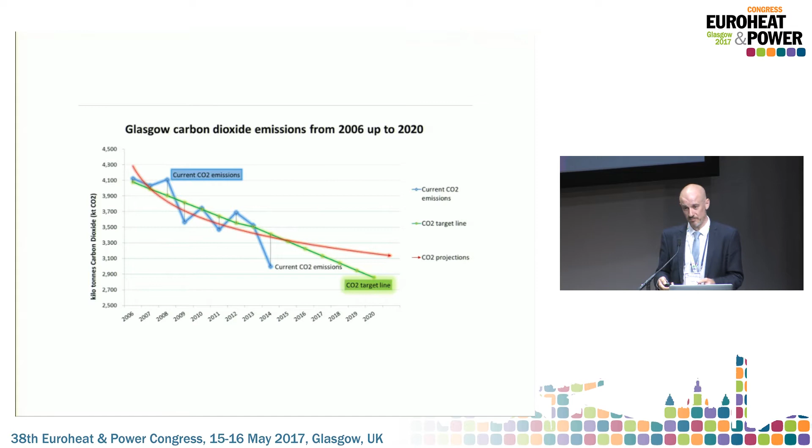So although we've made good progress, there's still a long way to go. Within that plan, there were 33 actions, each detailing how we would approach, both strategically and technically, achieving these targets. Amongst those actions, one was to phase out coal, oil and older inefficient electric heating in Glasgow.

Glasgow has the unenviable record of having a lot of fuel poverty, which for us is the situation where more than 10% of your earnings are spent on your utility bills. So in a very real sense, at least a third of the people of Glasgow have to choose between heating and eating, which is not a situation that we as a council believe we can accept.

A lot of this comes from expensive and inefficient heating systems. Another action was to develop a number of coordinated district heating schemes in the city. This would be expanding out from installed schemes, covering a mixture of installations to commercial and residential premises.

Unfortunately, I've not been able to be here for the whole conference, but I'm sure there's been discussions about the need for that kind of mixture of building types to make district heating successful.

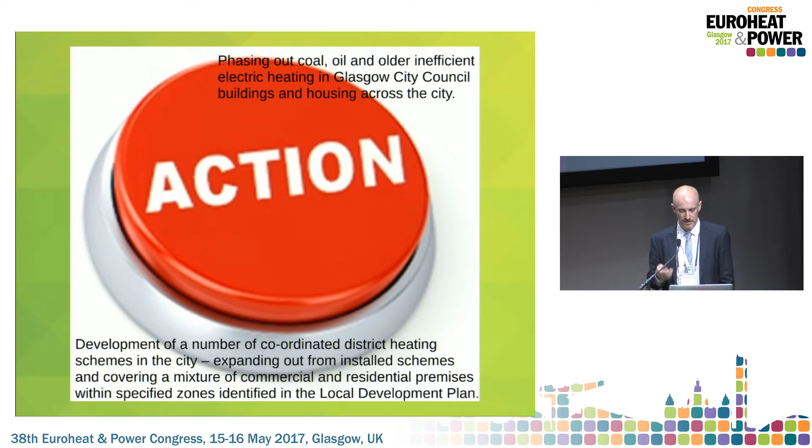To date, our ambitions have been largely anchored in gas combined heat and power engines. But as I'll show you, and as you should have heard through the progress of the conference, we are now developing more innovative ways to capture heat.

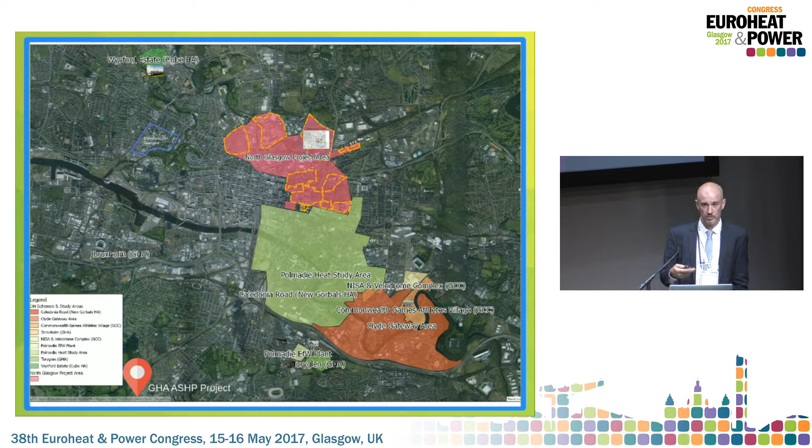So in 2014, Glasgow City was selected to host the Commonwealth Games. As part of that, our commitment was to create a village for the athletes to stay in for the duration of the Games. What you're seeing here is the athletes' village.

Within this village there are 700 homes, all connected to district heating. The sports arena is also connected. Now, while this is a huge success with 700 homes, they've now transferred and people live there — half of them socially rented, half private sale.

Within this area of the city there's a lot of poverty, and there's a lot more opportunity to expand this district heating system. We are looking at another 300 houses, a primary school and a nursery school.

Another major development going on in Glasgow is the creation of a £154 million energy-from-waste plant in the city. This is going to take 90% of our landfill waste away from landfill for processing, to create renewable energy and heat.

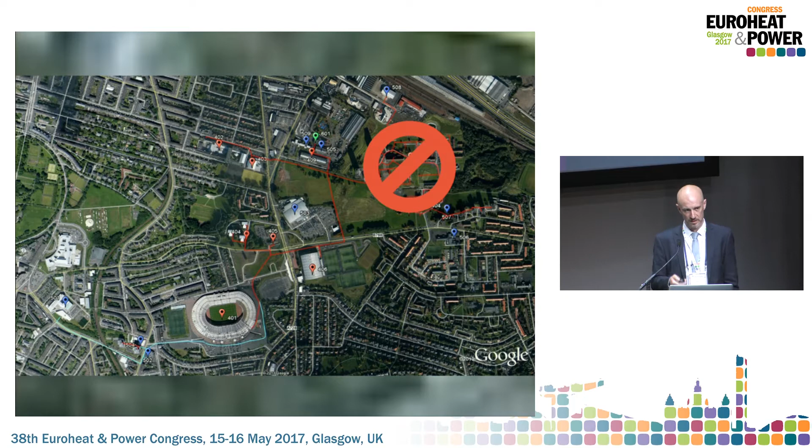So you have Hampden Stadium at the bottom there, the National Football Stadium, some housing association high-rise flats, shops. What's actually happened though, as well there being some great opportunities here, is that the time it's taken to develop the plant and then the energy centre and associated district heating means we've actually lost a major opportunity to connect up this new housing development — and in that time we've put gas in instead.

This is a real problem. I think in the UK, and in Glasgow, we're trying to make very different planning aspirations line up timing-wise, which means that project opportunities are quite often lost.

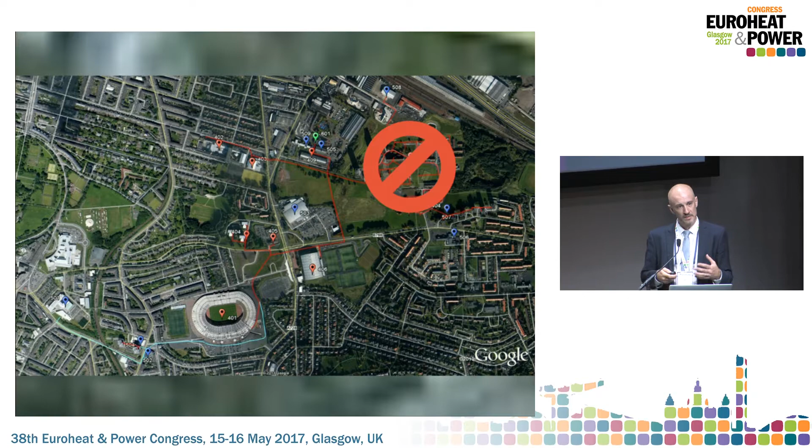This is another part of the city that was seen as a satellite network. The aspiration was to take the heat from the energy from waste plant and move it towards the city centre. This satellite network was supposed to be built in advance and then connected at a later date. Unfortunately, we couldn't financially make this add up.

One of the recurring themes I face in my daily life is that in the UK and Scotland, the way rates are applied to district heating, business rates, is punitive for district heating. If you put gas installations in, the rates are infinitesimally smaller than if you put in district heating. Gas installations are rated on their utility value, while district heating is rated on its construction value. We all know how expensive and laborious district heating installations are, so the rates that come with them make the heat difficult to compete with gas.

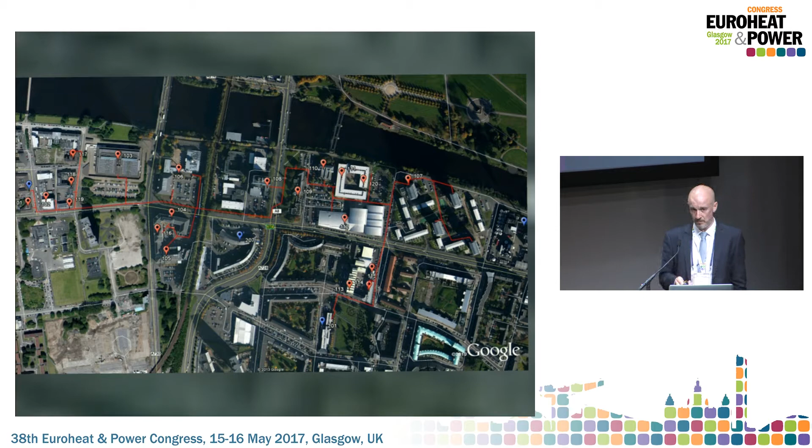This network never happened, but what I'm pleased to say you will have heard about probably earlier on is that we're now building an energy plant on the River Clyde, putting water source heat pumps in there and recovering heat from the River Clyde. So we're effectively replicating work that we've seen done by a local company, Star Renewables, in Norway and Drammen.

We'll take the water out of that and take that heat through various stages of a heat pump, get it up to the grade we want, and then provide heat—not blow up, but provide heat—to the Adelphi Centre, which is a business centre, a leisure centre, and this large housing development as well. If you think back to the wider picture, the length of the River Clyde, think how many opportunities this pilot project will give us.

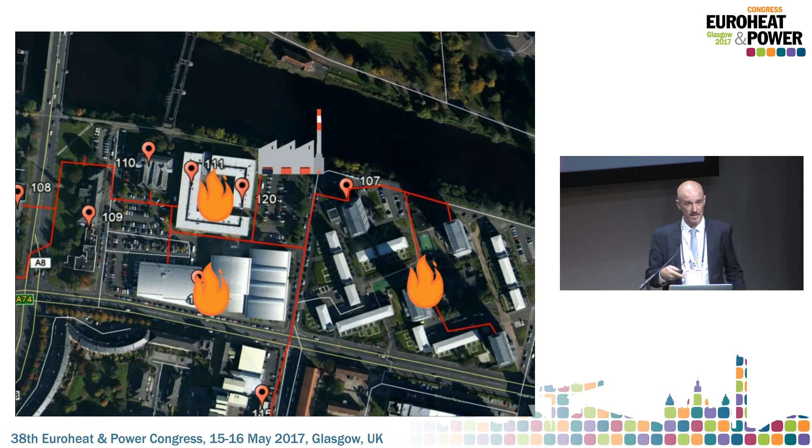We also have a district heating system in the north of the city called the Wynford Estate. This is a very large, for us certainly large, district heating network. It's 1,700 homes connected, socially rented homes, plus another 200 or so homes that have elected to connect themselves. This is a fantastic network. It does what it needs to do, providing low-cost heat through gas CHP engines.

But this provides yet another example of some of the difficulties we face, in that this was a heavily impoverished area, very, very poor. When they were promised this district heating, they were promised heat that was going to be so cheap they couldn't believe it. This was an area where people just didn't have their heating on—they couldn't afford it. So when this lower cost heat went in, they got heat, but it was still more expensive than they were used to, because they weren't paying anything. So even if it was low cost, it was still more expensive for them.

A very vocal minority then started to complain about that and gave district heating quite a difficult image in the city. Through an extensive period of communication and education, we've made people understand how to best make that system work, and it's more successful now. But I think that's an important message for us—the way these things are communicated, and the education and behavioural piece, is quite extensive.

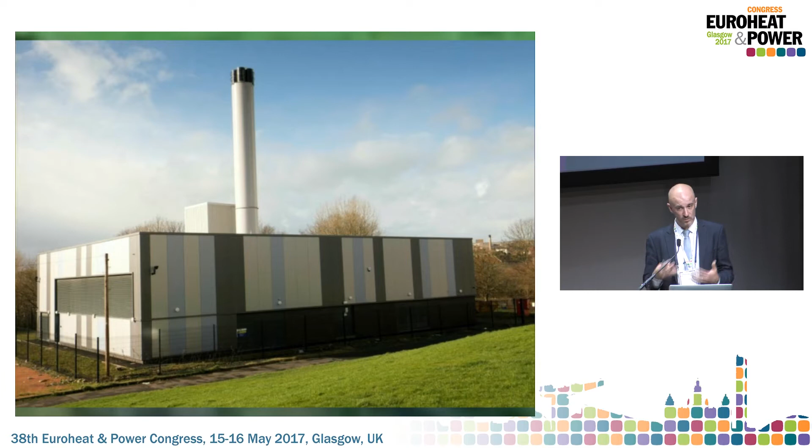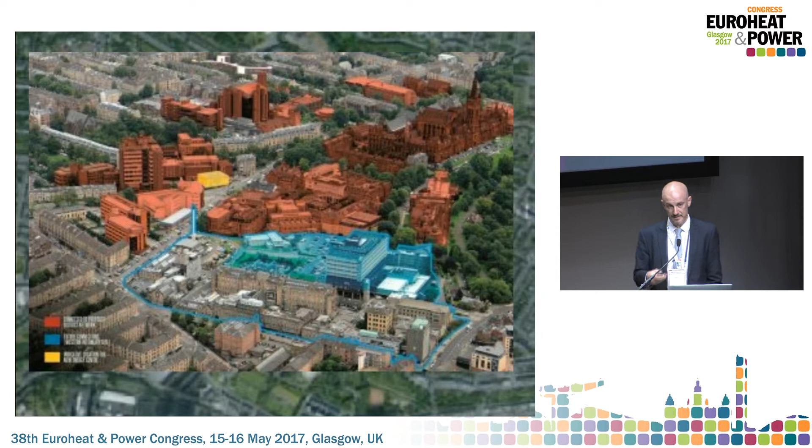The University of Glasgow is a very historic university with a large campus, which has now moved from a steam heating system onto gas CHP district heating. Every building you see in red is now connected to district heating. For us, this is an enormously successful story because it shows that you can retrofit district heating to listed buildings—historically difficult buildings to work with in an energy context, and buildings that we have a huge amount of. The area in blue is the next stage for their connections of district heating.

Next door to that, we have the Kelvingrove Art Gallery—again, another listed building, another very historic building, difficult to manage from an energy perspective. We are going to recover heat with our partners in Scottish Water Horizons and SHARC Energy from the sewage network that runs underneath the museum, and use that to heat and provide hot water to the museum. This is a huge example of what's achievable in a city like Glasgow, because effectively that heat network is already in the ground—we just need to tap into it and get the heat out of it.

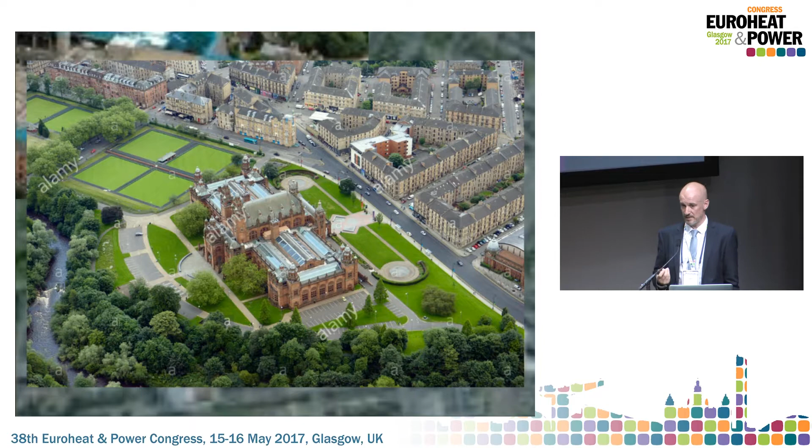Another project that we're looking at that's quite innovative in the south of the city is using air source heat pumps to capture heat from the air and use that combined with solar thermal to provide heat to some socially rented housing as well. And finally, in the Clyde Gateway area, we're looking at other opportunities to recover heat from sewage, provide heat to business parks, and actually boost economic growth through the provision of low-cost, low-carbon energy.

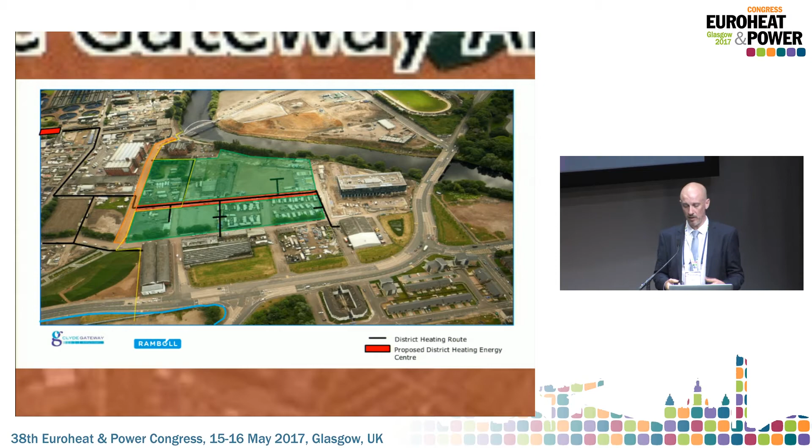We spent a lot of time working on an area called City Centre North in North Glasgow. Within that, we had identified 9 different areas for district heating and went to great technical depth to look at each of these areas, where the network would go, who would be connected, what kind of project it would be. All of the ones you see at the top of the screen are now in some form of stasis. They're not working, or they're completely dead, through various things, but most likely through cost.

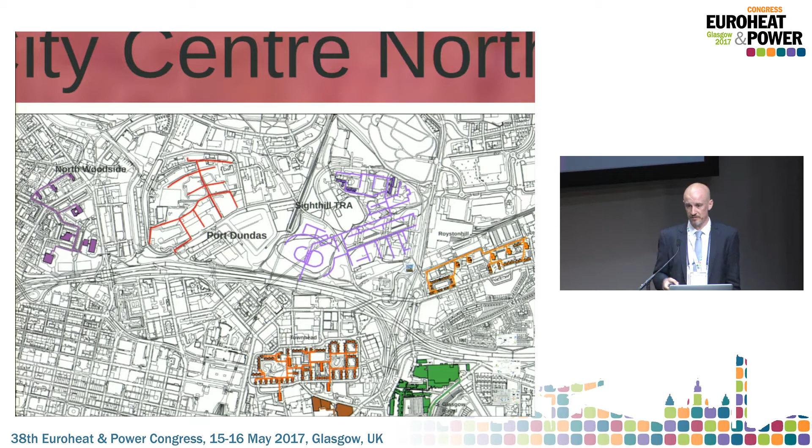There was some mention earlier on about the cost of capital and bringing the cost of capital down. That would have helped us enormously in getting some of these networks off the ground.

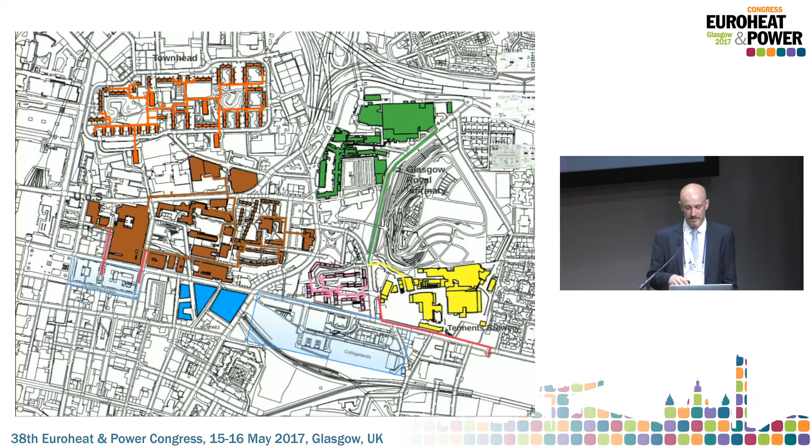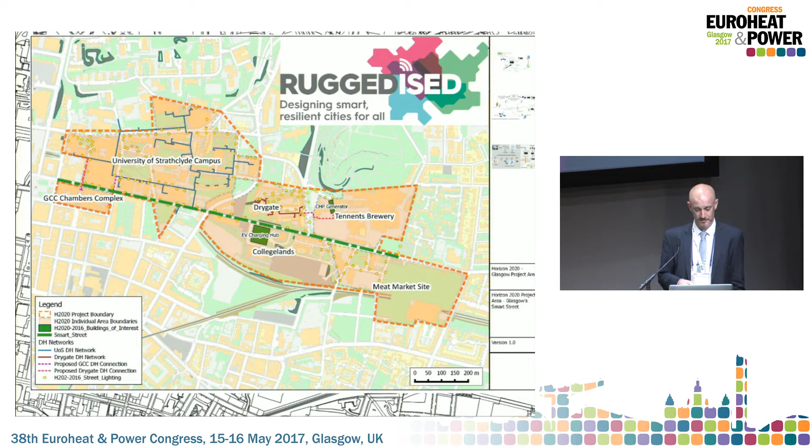In the city centre, we had a number of networks planned, and of those, only 2 at the moment look viable. Those 2 networks have been the basis upon the construction of a bid for Horizon 2020 money. We were successfully funded by Horizon 2020 in a project called RUGGEDISED, which stands for Rotterdam, Umeå, Glasgow Generating Exemplar Demonstrations in Sustainable Energy Districts. And I did win a bottle of wine for coming up with that.

Within that, you have district heating in the University of Strathclyde, and below that you have our council headquarters - a very historic city centre, city chambers complex. Again, quite energy intensive and difficult to deal with. What we are looking at is not the technical way to provide heat from the district heating network into that building, but instead the business model.

This is not something that we are used to. We don't have regulation on this in this country. We don't have companies that are doing this as normal. This is something that the local authority thinks that maybe it should be involved in, but isn't quite sure how. So we need to look at what the business model is that ensures we can have a regulated relationship, be that through a contractual relationship or an ESCO.

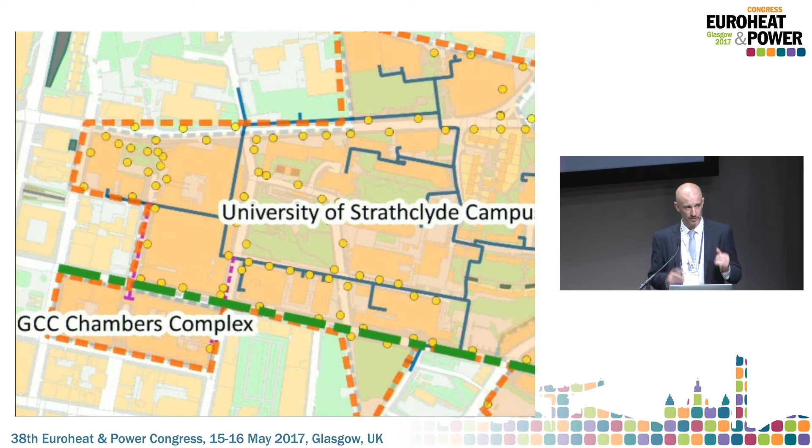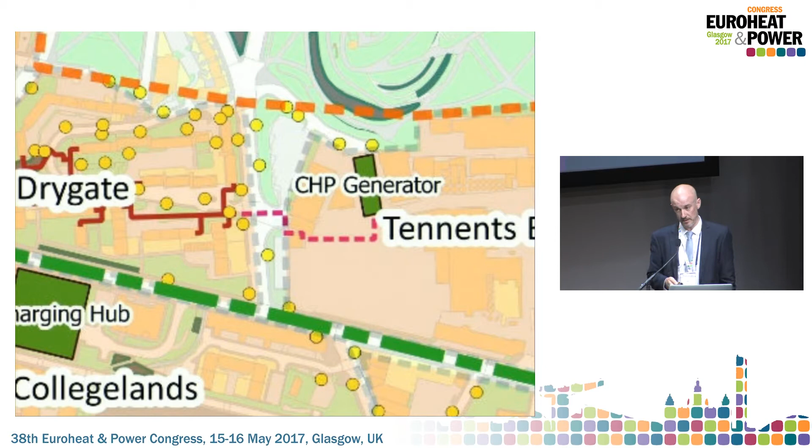Equally, on the other side, we have Tennents Brewery, which through their production has waste heat, which they would like to give or sell to the neighbouring housing association. So I'm rapidly running out of time. The project also includes a number of renewable energy projects, smart energy systems, wireless communication, data, and a very sophisticated degree of integration between all those points, which I can't possibly go into detail in 35 seconds.

However, one thing I did mention was the ESCO - an energy services company - about the management of all these stakeholders, the management, potentially ownership, of a heat distribution network, the facilitation of district heating in the city, and the utilisation of all this innovation to deliver the benefits we need for affordable warmth, the opposite of fuel poverty, to generate surpluses which are reinvested, to basically do all the things that I've heard you and your wonderful cities do for the people that you have. And that is me bang out of time. Thank you very much.

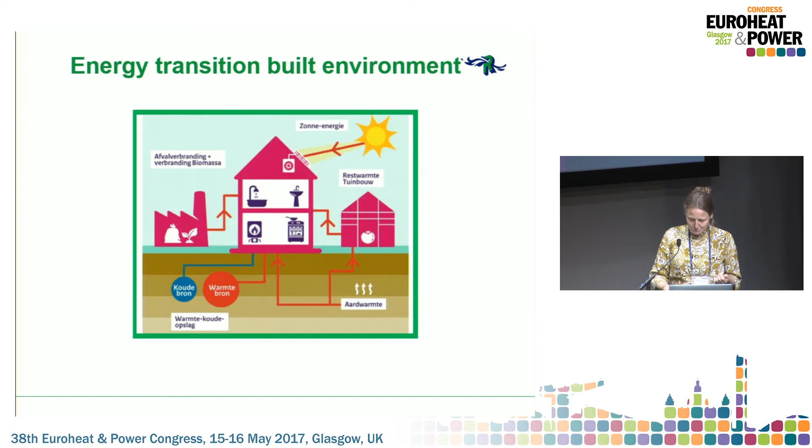To make it a little more explicit, if I start this year, in order to reach 2050, I need to change 8,000 houses every year, which is huge, and which we don't manage at this moment. So the challenge is big.

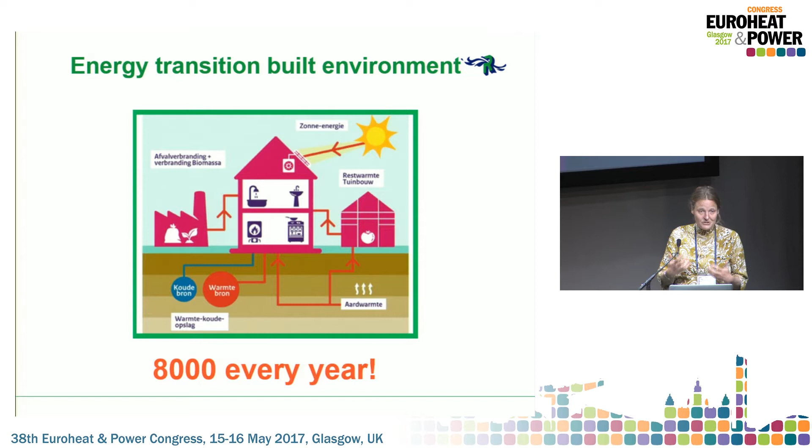The way we look at the challenge is from a local perspective, which means we change the houses. We need to insulate them, connect them to another kind of energy structure other than natural gas. At the same time, on a regional level, we need to change the sources, because even if I have a house now connected to electricity, it's not CO2 free. It is fossil fuel that makes electricity. So the new energy systems we're going to use need to be connected with more sources with lower emissions.

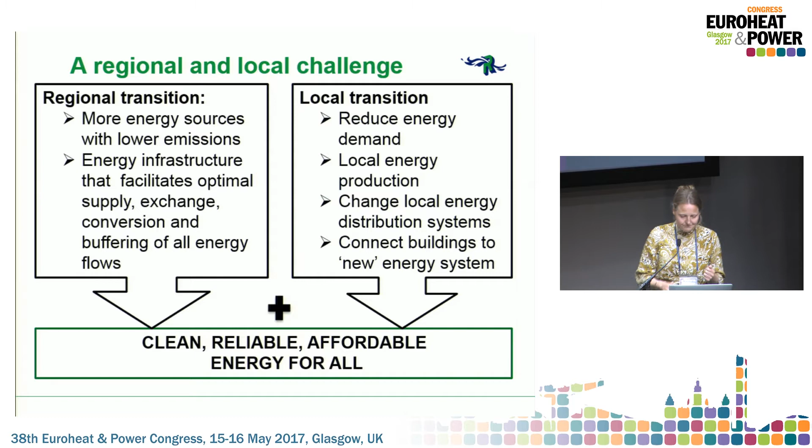The second thing is that the energy infrastructure as a whole needs to change, because we need the supply, exchange, conversion, and buffering of all that energy flow. So that's a different kind of infrastructure than the current one. And in the end, it has to add up to clean, reliable, affordable energy.

Back to the local level, what does it mean? Basically, we look at it from the perspective of how are you going to heat up your houses. Either you use middle or high temperature, being 70 degrees up to 100, 120 degrees, meaning you insulate your house and connect it to district heating networks, or you have the transition towards low temperature. Then you have to insulate much more, and you connect to the electricity grid using heat pumps.

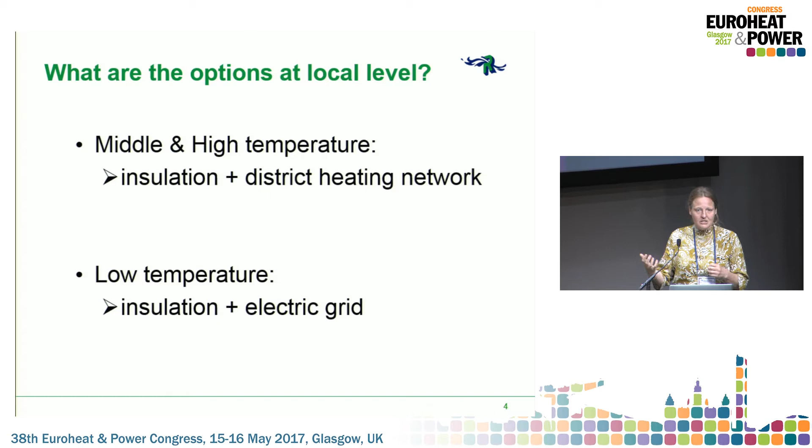On a regional level, we have to work on a program of transforming towards more sources. We are working on a major district heating network, an infrastructural network that brings the heat to different cities, and exchanges the residual heat from the harbor and brings it to different towns. We are already connected to the waste incinerator in Rotterdam, but that's sort of a precondition if you look at the transition in the city itself.

So if you look at the energy transition in the city, there are some questions we need to ask ourselves. Who needs to participate? What are we going to do? How are we going to do it? Where and when? Those are simple questions, but with a more complex answer.

So what we started is the stakeholder involvement. We try to involve the people that are part of the solution, and we are doing research to get answers on what is possible and how we're going to do it. We are trying to map more or less the answers, to make visible what we're going to do where.

I'm going to talk a little about the pilot project we are doing at this moment. We have an area with about 1,100 houses, and we look at 4 dimensions: the technique, so what is possible and what is needed; the financial consequences; the social aspects, so what do people think, what do they want, what are the barriers for them to go into transition; and the other opportunities, like combining work with sewer system maintenance, or other challenges.

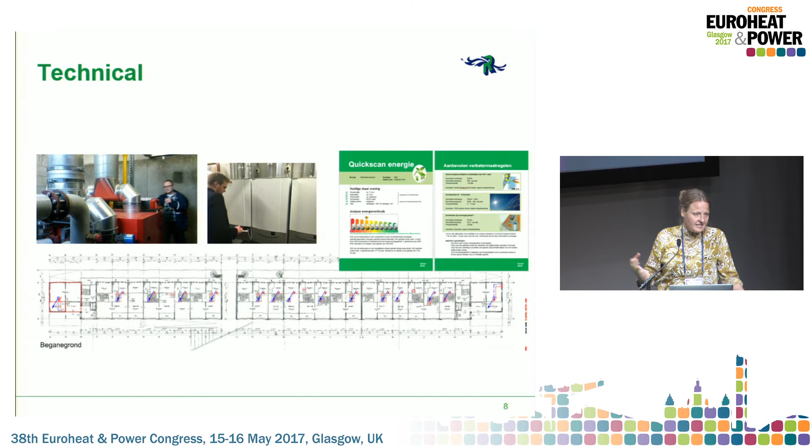So technically, what we did is we actually went to the houses. We went in, we looked at where's the boiler at this moment, what are the options, what if we want to make the house all electric, what do you need to do. We did energy scans, so we really went into detail to see what were the options.

Then we translated it into the financial consequences. What we did is we calculated for the whole area, over a period of 40 years, the total costs - the cost on building level, the cost on grid, for both district heating, removing the gas grid, enforcing electrical heating. We calculated the energy cost over 40 years, divided it over 40 years and over house, so you have an average cost per house.

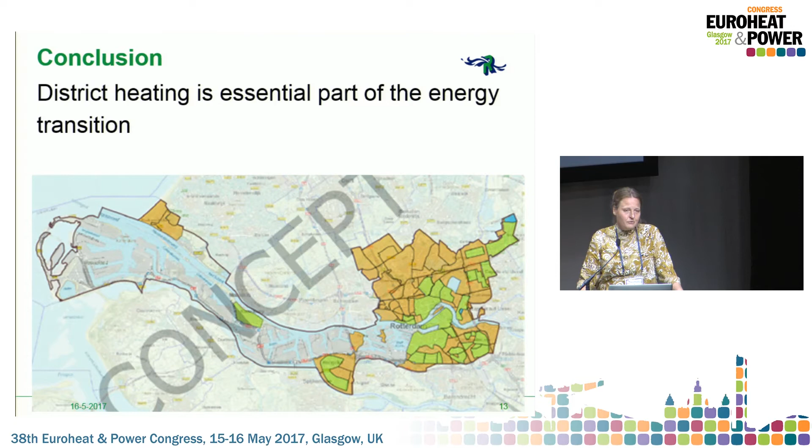So district heating is important also from the perspective of the distribution of energy, in balancing the system and making sure you have backup systems - even if it's cold and there's no wind and sun, you still have heat. So we think district heating is both on a local but also on a regional level an important thing. But there is a big if, and I think this is the important one.

First of all, district heating is only going to work if the heat supply transforms towards low emission. That's where heat companies play a big and important role, because at this moment not all people are convinced that their heat is going to be low emission. People are afraid to connect to district heating because they're afraid that in 20 years they'll be told to do something else. So if you want district heating as a serious option in the energy transition, you have to be very clear and transparent about the transformation of your sources. You have to be trustworthy, and you have to show what you're going to do.

The second point is that everybody needs to participate, because it's the cheapest solution when you combine all the costs and benefits. So it's only the cheapest solution if you are willing to participate and distribute the costs and benefits and cash in on those opportunities.

Otherwise, it doesn't work. There's never going to be a moment in time where every person says, oh yes, today I want to change my boiler, today I want to renovate my kitchen, today I want to have a sewer system replacement, today I want to replace my gas grid. It's not going to happen. So every piece of the transition is going to end up with winners and losers. Only if you're willing to distribute the costs and benefits between winners and losers might you be able to get the most optimal solution. But if everybody just waits for their individual optimal solution, we're going to have a worse case. So distributing the costs and benefits is hugely important.

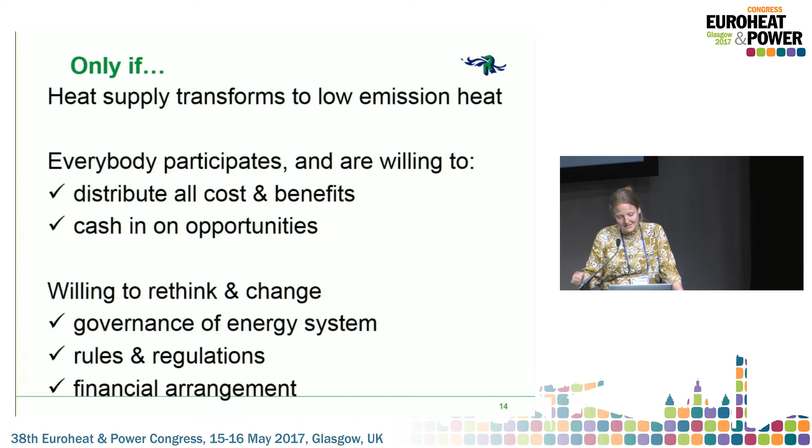So those were my conclusions. Yes, district heating, but there are some issues to be solved, and I think the essence is basically the second point: that everybody needs to participate. Thank you very much.

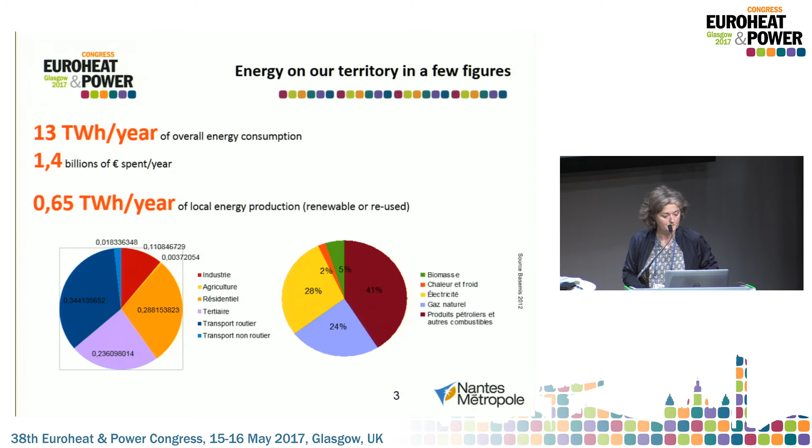And we have fixed CO2 objectives, as other territories, of course. So to aim for factor 4, we have decided to reduce by 30% by 2020 per inhabitant, and 50% by 2030, the CO2 emissions per inhabitant. We have also objectives of local production of renewable energy, because we quantify our resources, and so we have a limited potential, as many urban territories. We can't produce more than 20% of our current consumption of our territory.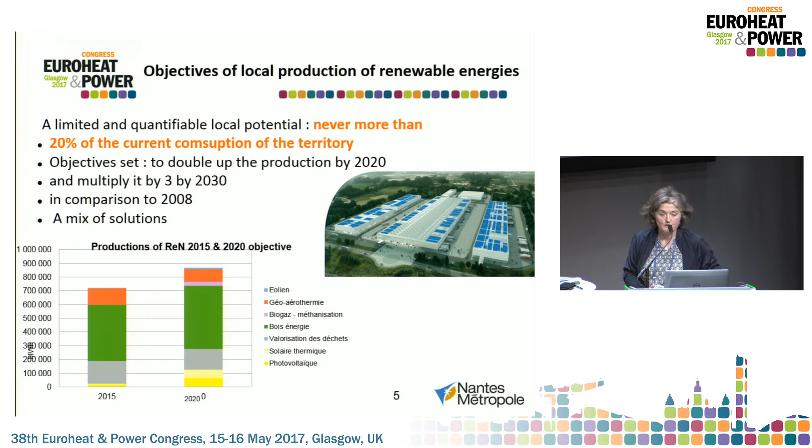That is to say, we have to work on reduction of consumption, but also relocate the production of energy. So we have objectives, but we have to develop a mix of solutions, because Nantes has a temperate climate, so we are at a crossroad between a lot of solutions: district heating, for instance, that is more developed in northern or eastern European countries, and southern solutions, for instance like solar or others.

That's why, to work on that, we have integrated a wide range of legal responsibilities in France. We have responsibilities in production and delivery, in electricity, gas, and heat, but also on local transport, waste, housing, and urban development, which are the real levers to reduce consumption. That's why we can really make an energy planning, working on the supply of our buses, working on building retrofitting with a special team dedicated to help owners to do that, and with a lot of actions.

For instance, we've got a solar plan, and this solar plan is constituted of very different types of actions. For instance, this solar platform helps people identify their potential, the potential of their roofs, because in our cities we have a real wealth: it is our roofs, and we want to make them useful. So we developed this kind of project with universities, laboratories, and the National Geographic Institute, but also we work for developing local electricity production with solar production, for instance with big solar centrals.

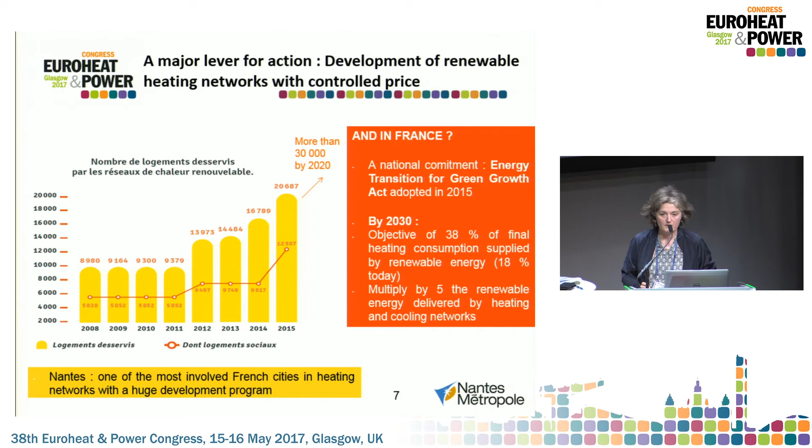So just one interesting figure here: in 6 or 7 years, the big increase of our district heating represents more than 120 million euros spent on our territory. That means employment and activity, and it's very interesting for us because it's a way to develop local employment, and so to get back the money spent on energy.

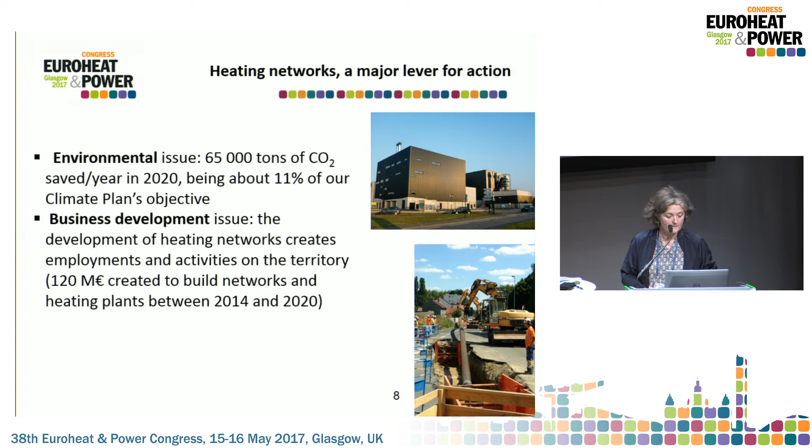In Nantes, our politicians pay a lot of attention to social issues, and as we know, energy prices are very volatile and they are rising. That's why we want a controlled price to reduce energy bills for users. And I have to say that in France, apart from our own pricing, we have also reduced VAT if district heating is supplied with more than 50% renewable energy, and we also have national funds. So it's a great help for us.

I also want to explain that we work with different public service delegation contracts and different operators. So we have different contracts that allow us finally to find the best practices of all operators, and this helps us improve our contracts, always for the benefit of users. It's a policy we can find in Nantes also in other fields like water, with different kinds of delegations.

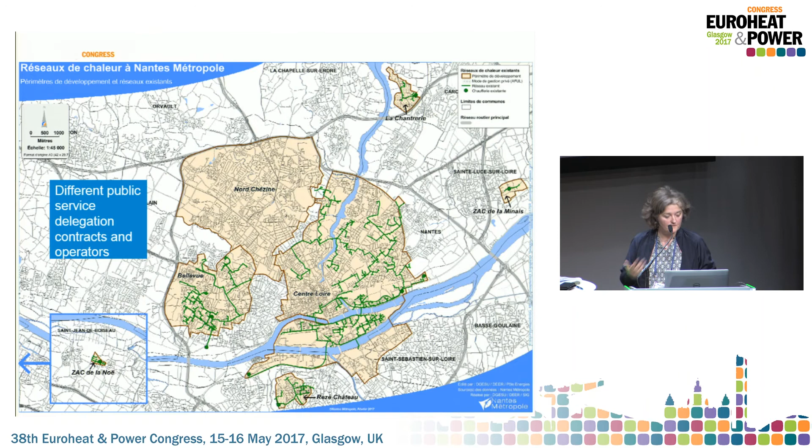What's important to say also is that today we have 6 heating networks, so I won't explain everything. In general in Nantes, we historically had a high rate of renewable energy, about 73%, mainly from waste and wood. By 2020, we will keep a huge part of renewable energy, around 75%, although the district heating will be much more important than 10 years ago.

So it's a real challenge for us. At the same time, as I said, social issues are important for us, so 50% of social housing in the city of Nantes will be connected through our district heating. That's an important thing for us, and you see that we move quickly with them, working together with social housing to achieve this.

I want to say that we study our potential, and we've decided to develop new infrastructures, but we also support private stakeholder projects, such as private owners' associations that want to develop small district heating systems. We help them with engineering, for instance, to allow these projects to emerge. We have 2 or 3 like that in Nantes.

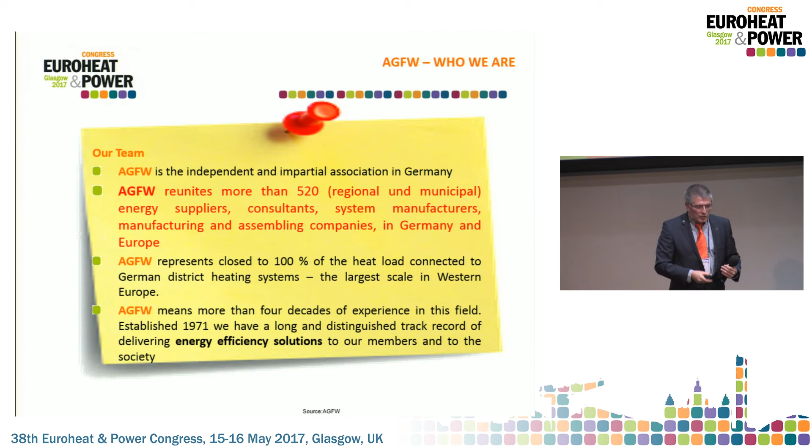And for this we work it out, and this experience is coming back to our products which we have. So what's the first pain I know? The first pain in the urban development, in the efficiency urban development in our city, is we have no common language. Or do you think we have a lot common language?

What do you think? Do you think we have a lot common language? So I'm coming now a little bit downstairs, it's a little bit interesting more than for you. What do you think? We have a common language between the city, the politicians, the municipalities, the energy side? Have you the common language? What do you think? No response? No, I heard. Who do you think? Hands up. Who thinks we have a common language between it? Who thinks we have no common language?

It's 90%, over 90% I think. And this is real. So what must we do? We know it in Germany. The former president of the United States said it to Mr. Gorbachev. What did he say? Tear down this wall.

Yes, we must tear down this wall, so that we are doing our job very well. Tear it down, because how do they know the urban development planner, what we do. Do you know what was in your flat last year? Your heat need in the end energy? How many kilowatt hours? You know that? Who knows it? Hands up.

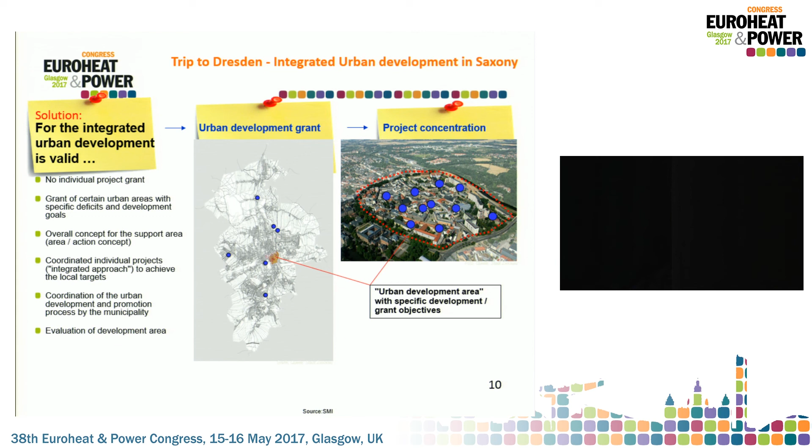Well, is this pain also for you? No money, the economic side of district heating? Because I'm coming up to you now. So how can we finance our project if it's not in an economic way? What do you do with your projects? Some solutions? You don't do it? Or how do you finance it?

What are you doing with your projects? What do you think in the United Kingdom, for district heating? If it's not in an economic way, what are you doing? Nothing? Wait, not in an economic... when it's not economic to do a project in district heating, you don't do it, okay? This is one solution. Not mine.

Because we have some funding for it. We have grants, national grants. If you see it on the bottom, we have a German urban development funding program, and we have the German CHP law. But you also have, in the EU, a funding called the European Regional Development Fund, and reduced CO2 emissions is the focus there. So you can use these grants for it.

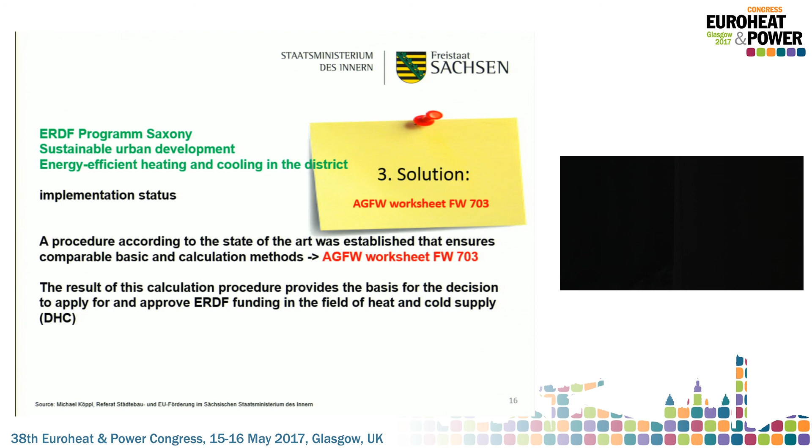And for this we make a solution, and you see here the ministry solution at this point. So we make worksheets for it, how to calculate it, because we are doing one thing at this point: we calculate the funding gap. It's not the economic gap, it's a funding gap. It's a bit of a different view: you earn money with your business, and when the state says CO2 reduction is our focus, what is the money needed for this investment to do what the policy wants? This is what we calculated.

The solution, and it's unique what we are doing, is to make it in rules, in national rules from AGFW, with our objective and transparent, effective procedure. It takes the amount of the unprofitable cost, and we also calculate the CO2 emission. You may have learned from Mr. Lubinski in the morning that we have several calculation programs, and we use the efficiency criteria for district heating systems.

And for the CHP systems in our rules, the fourth pain we learned yesterday, also here in front: digitization for district heating systems. But how can we do it? We have a lot of solutions seen in the exhibition sometimes, everybody has it in mind. We do it in approval now for 8 cities with 12 districts using our R&D project.

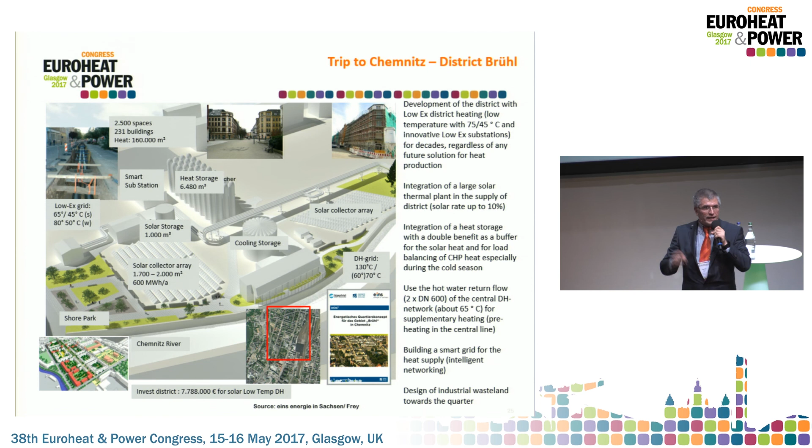This is the last thing I'll show you from Dresden: this district where we invest more than 20 million euros for district heating development in the city and for the future. Also in other cities, as you see here in Chemnitz, this is real, it was built last year. Solar, about over 2,000 square meters. Heat storage, cooling storage, solar storage. Low Ex for over 230 buildings in this district.

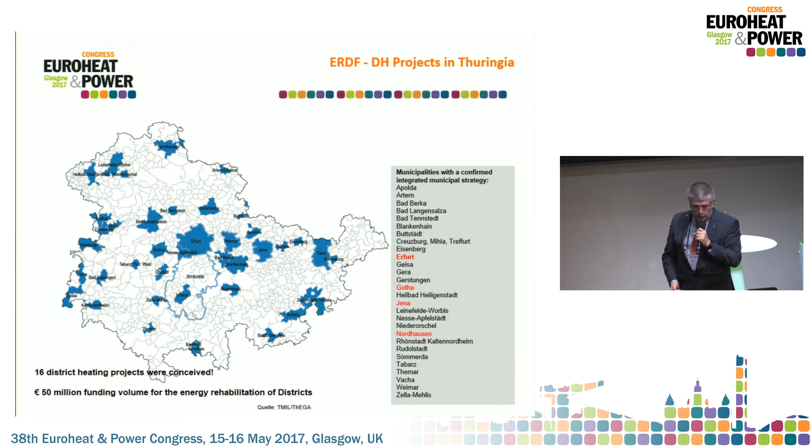Also in Thuringia, we have 16 projects there with 50 million in funding and action. What I need help from you with is to bring this integrated urban development thinking to the policy in Brussels.